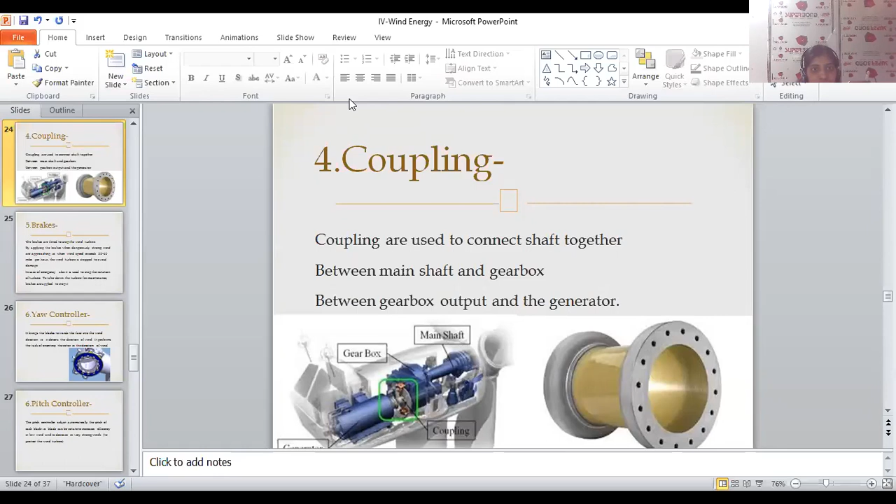So why are brakes necessary in case of the wind energy conversion system? Brakes.

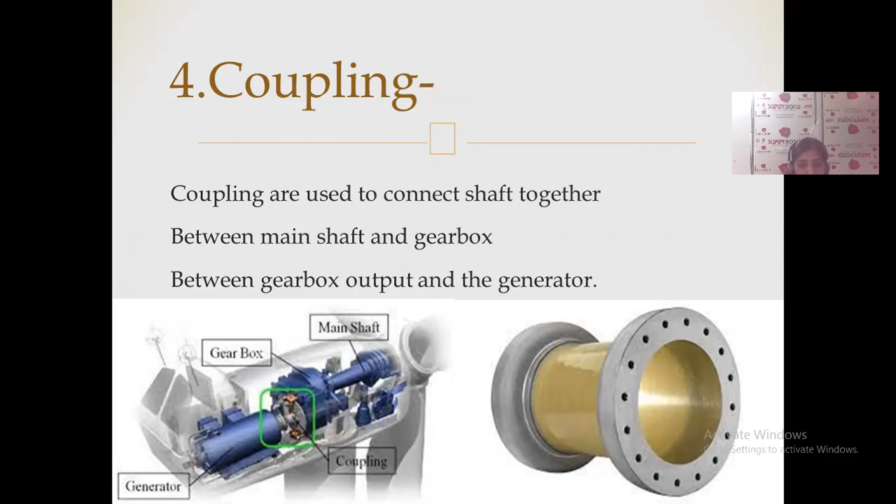In case of high speed wind, we have to shut down the system because it may cause damage, or if you want to do maintenance of the wind energy conversion system, you have to stop the system. So for that reason, you need brakes to stop the rotation of the wind blades. That's why brakes are necessary in case of the wind energy conversion system.

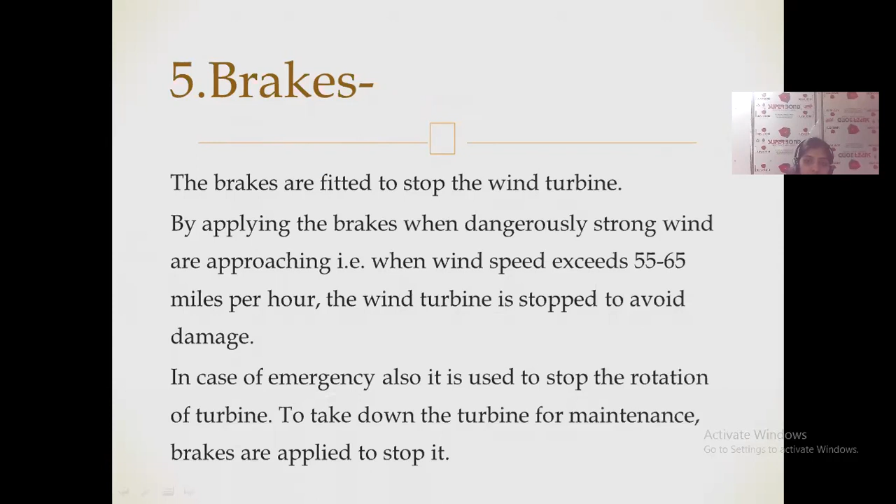Yaw controller. Who will tell me the function of the yaw controller?

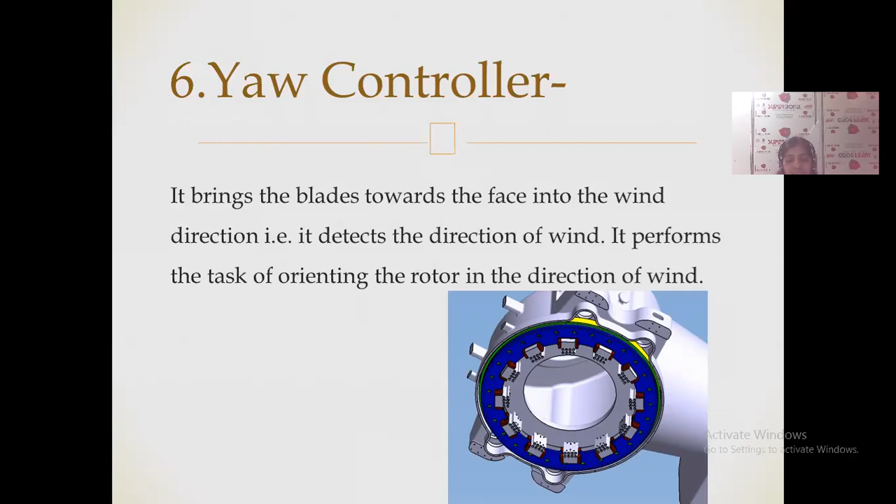See here, the direction of the wind coming from the environment is not from a particular direction. It may be from left to right, or right to left. So in such cases, we have to adjust the direction of the wind blades. The controller detects the direction from which the wind is coming, and accordingly adjusts or orients the wind blades so that whatever wind comes from the environment will fall on the wind blades. So to detect the wind direction, the controller is used here.

Next, pitch controller. I'm sharing the PPTs, but still you are not telling me the answers. It adjusts the blades in the wind turbine by rotating them.

It is used for adjusting the speed of the rotor blades, wind blades. That means in case of high speed winds, it tries to decrease the speed, and in case of low speed, it tries to maintain a constant speed. So for that reason, the pitch controller is used here.

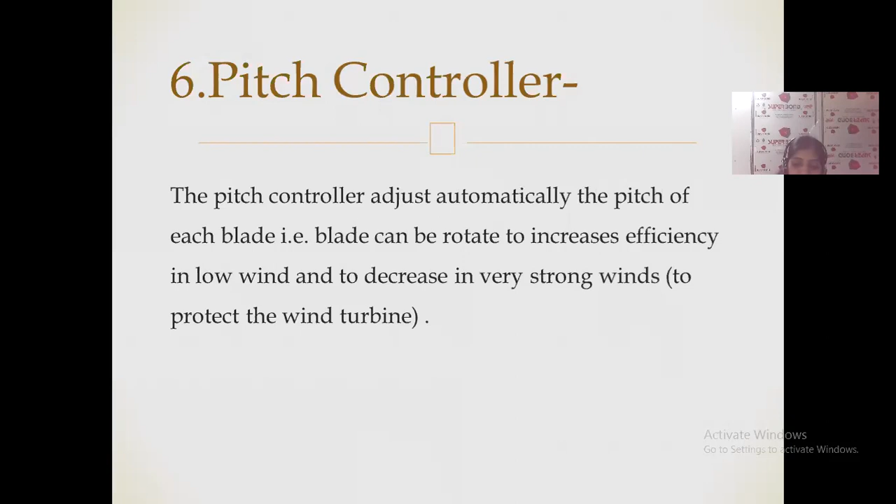Next, electrical generator. Electrical generator is known to everyone.

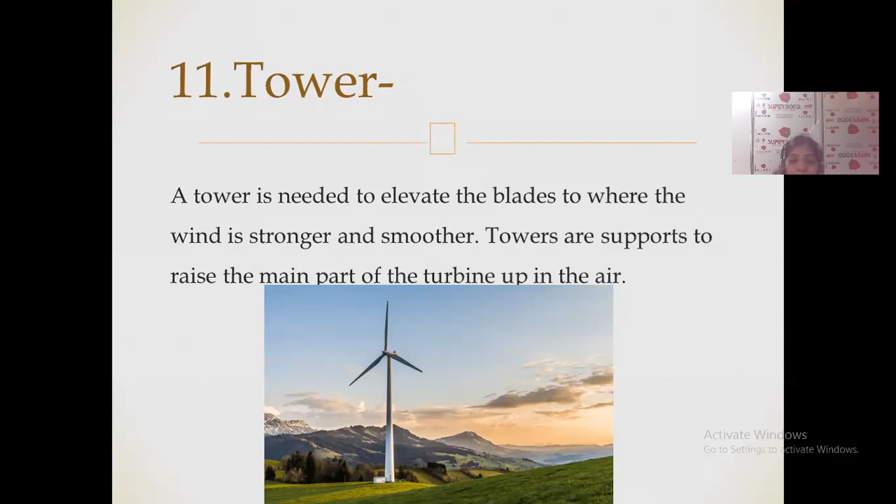Next, nacelle. Why is nacelle used? Nacelle tower. Now tell the answer. What is the function of the nacelle?

Nacelle is a protecting cover. So which components are protected by the nacelle? Gearbox, rotor shaft, rotor, brake, etc.

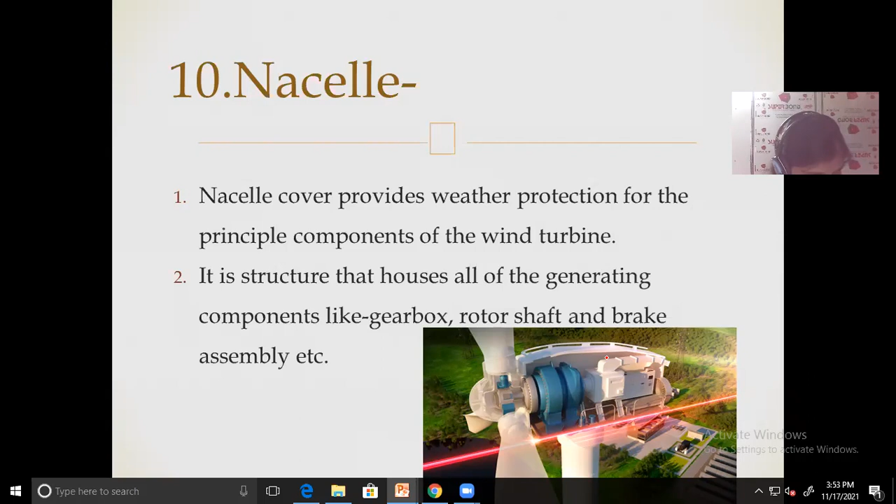Next point is the classification of wind energy conversion systems. There are total 2 classifications, done on the basis of the axis of the wind turbines, that means in which axis these wind turbines are placed - horizontal axis or vertical axis. So what is a horizontal axis and vertical axis?

Okay, so vertical axis turbines are made just for low power generation, and horizontal axis turbines are used for high power generation. In case of high power, wind speed is high, and the speed of rotation, that means rpm, is higher in case of horizontal axis wind turbines. But in case of vertical axis, we get fewer rotations per minute, and this structure is possible only in case of low power generation.

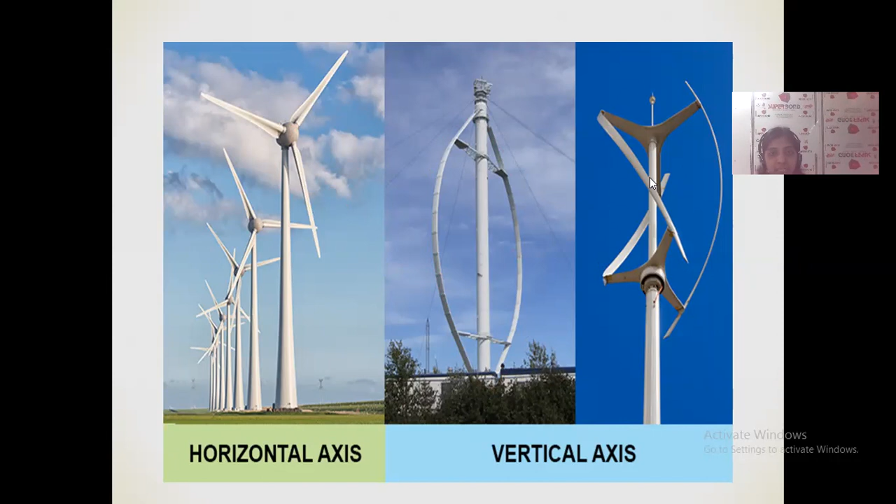The next classification is based on the type of output power, meaning whether we are converting the output power into AC or DC. This depends on the application, which determines which type of power supply we need. So the classification may be based on the type of output power, which may be DC or AC.

The third classification is according to size. According to size means how much output power, useful electrical output power, can be generated by the wind energy conversion system. Depending on that, the size of the system is defined. For small scale, up to 2 kilowatt power output is generated. For medium size machines or plants, we get 2 to 100 kilowatt output power. And for large scale, more than 100 kilowatt output power can be generated.

Where is this 2 kilowatt power necessary? In cases of running motors for pumps, for pumping water, etc. For that reason, a small scale wind energy conversion system is necessary, and such a plant can be used for up to 2 kilowatt. Some residential areas can utilize this type of wind energy conversion system. For large scale systems, the generated electrical energy can be transferred to the distribution center or to the utility grid.

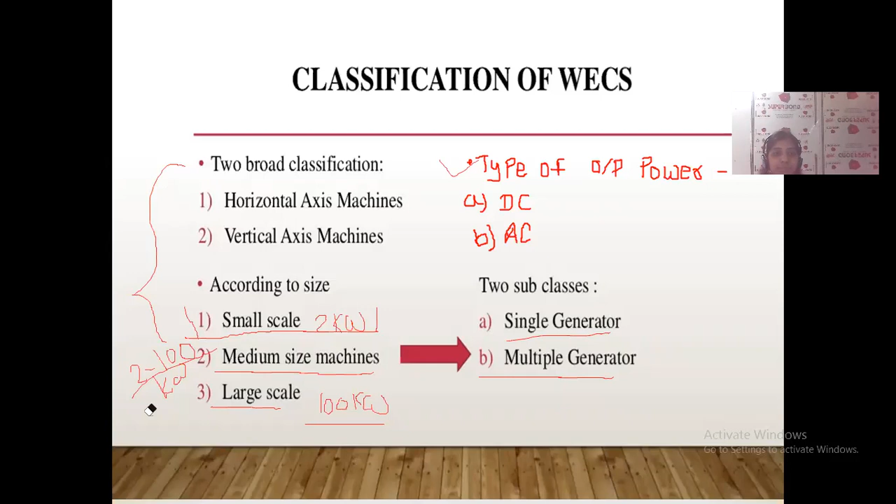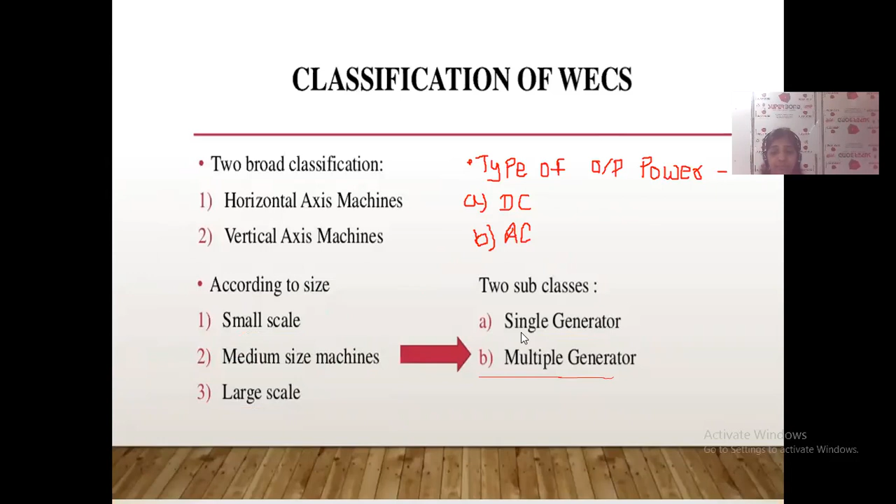The fourth classification is rotational speed, which depends on the type of generator you are using. This includes constant speed, nearly constant speed, and variable speed with fixed pitch blades. There is also constant speed with variable pitch blades. Pitch blades means the blade pitch used in a pitch controller to adjust the speed.

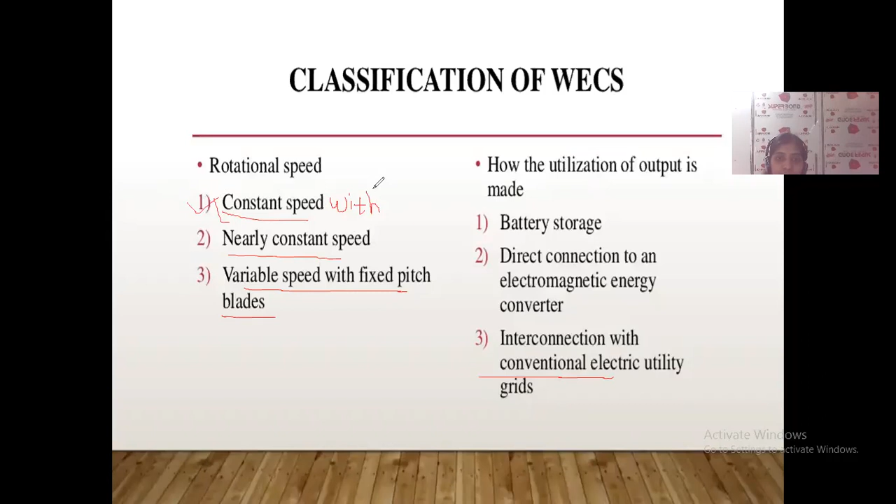In the case of constant speed with variable pitch blades, we can vary the pitch controlling mechanism. By using this mechanism we can maintain constant speed, and for that reason most synchronous motors can achieve constant speed. So there is constant speed with variable pitch blades, and in the case of nearly constant speed, we use fixed pitch blades.

In this classification, the first two types are nearly the same in terms of constant speed. The only difference is that in the first one we use variable pitch blades, and in the second one the pitch blade is fixed. For constant speed we use synchronous motors, and for variable speed with fixed pitch blades, induction motors can be used, giving nearly constant speed.

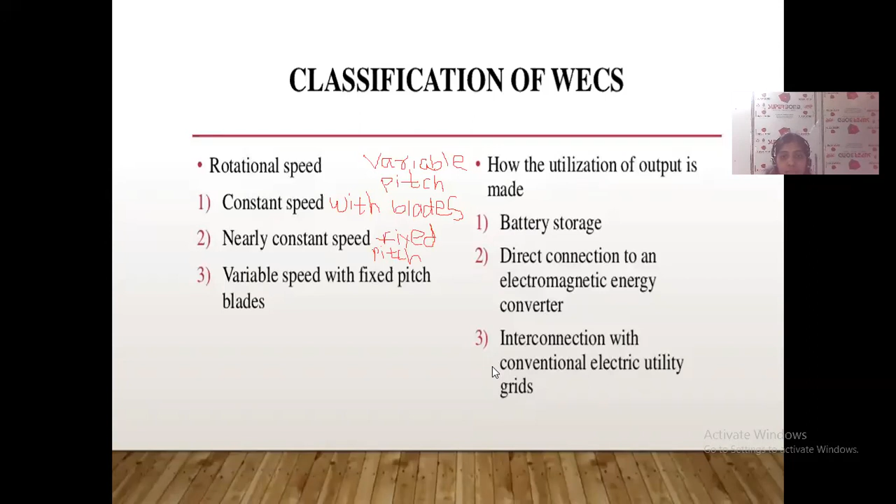So the next point is the advantages of the wind energy conversion system. Just think of what will be the advantages of the wind energy conversion system. Why is this system useful? What are the advantages?

Kiran Rokde, Kishori Sawant, Kishori, are you there? The next, Pooja, you just think and tell me what will be the advantages of the wind energy conversion system. What is the benefit of using that system? Ankita, can you tell? Aditya Borate, Swapnil Goon, Chaitanya Hoar, Vedant, Rushikesh, someone from you. You all know the answers, but you are just staying silent. I don't know why you are staying silent. Only one girl is responding always. Kundan Singh.

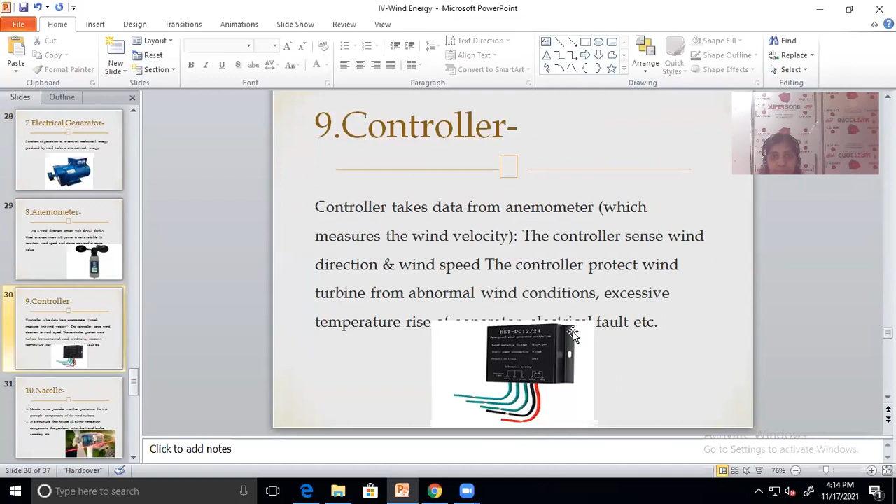So whatever energy is generated from the wind energy conversion system, is it constant, or does it vary? Sometimes the electrical energy generated by the wind energy converter system is high, sometimes it is low. So it is not constant, and this is one disadvantage, because if you want to supply that energy to the consumer, it will not be beneficial to provide unequal energy. To satisfy the consumer, we need to supply constant energy throughout the day, so for that reason we need storage capacity, so that when there is less energy production, additional electricity can be provided.